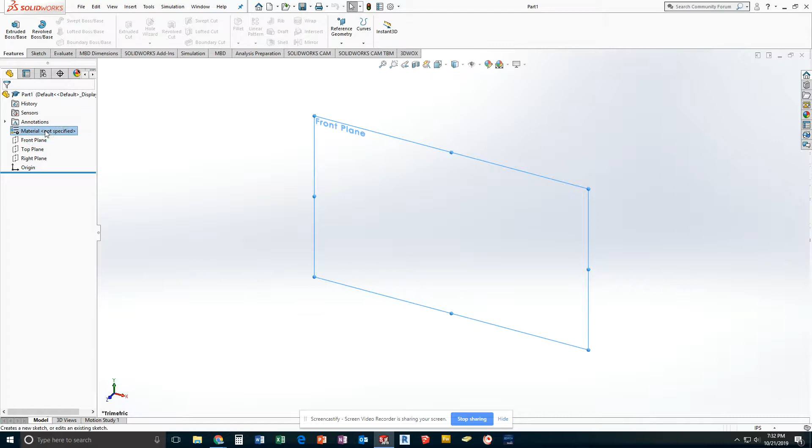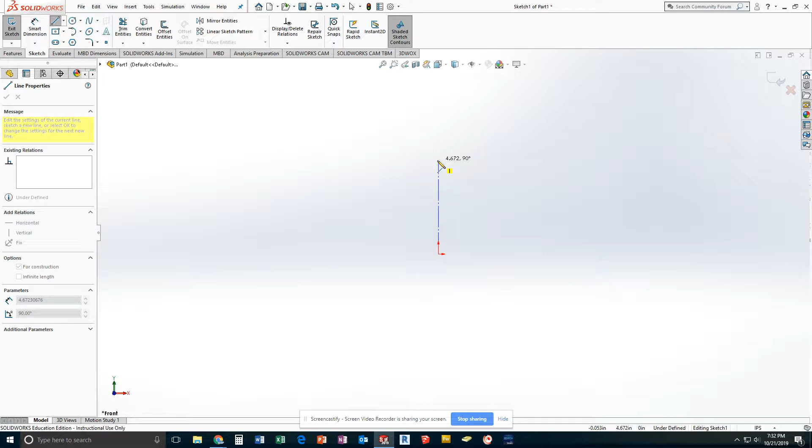To start with, I'm going to go to the front plane and start myself a sketch. Once I'm done that, the first thing I want to do is drop down my line tool and grab a center line. This is going to be the axis in which my coffee mug is created by rotating around it. I'm going to start it on the origin and draw it straight up over 4 inches, just because that'll make things easier, and make sure it's vertical.

Next thing I'm going to do is switch just to my standard line tool. Somewhere near the top, don't actually line it up, somewhere near the top-ish, I'm going to draw a non-vertical line, meaning it's close to vertical, but not actually vertical. So I don't want to get that relationship of a vertical line. I want it something like this. Because what I'm going to do next is use my dimension tool to identify where in space this point is and where in space this point is.

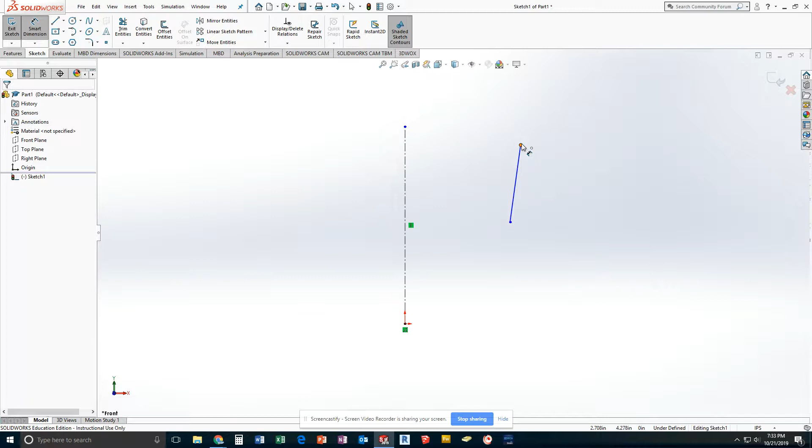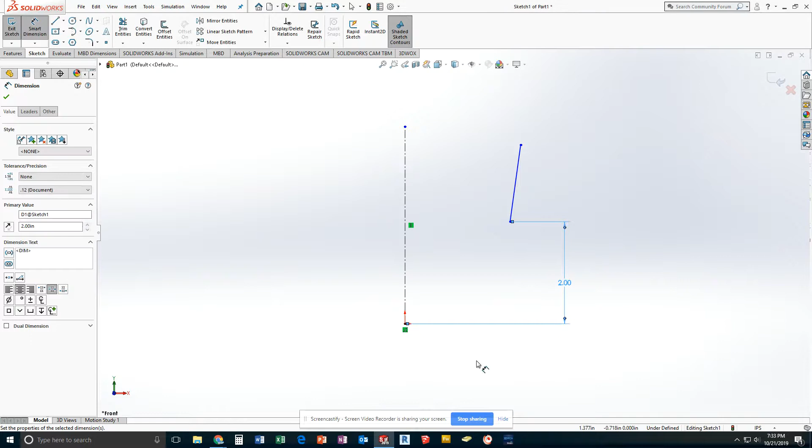So the first thing I'm going to do is go from the origin to the bottom point, and I pull sideways so that I get the vertical height. This I want to be at 2 inches. The next one I'm going to do is go from my point to the top point, pulling outside here, and I want this to be 4 inches so that I have that line there.

Now the next thing I want to do is identify these horizontally. I could do exactly the same thing, but since I'm having to draw half of the coffee cup profile, if you're measuring something, sometimes that's not easy to do, especially with circles. It's much easier to sometimes measure the diameter using a caliper or something of the sort. So here's a cool little trick in SolidWorks. If I click a point and then I click a center line, it'll give me the distance between the two. Or if I move across the center line, it would give me the overall distance if I had known the diameter, since this is going to create something round.

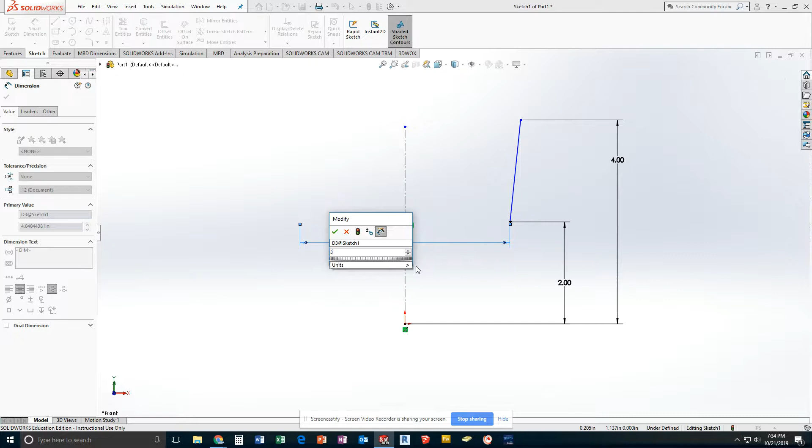This is what the directions show me to do, and I'm supposed to set this one at 3 inches. And then the top point to the center line, I'm supposed to set at 3.375. And I'll set those there. That's my first line, and you can see that I am now fully defined. It's a nice thing to do to kind of check on your way that you are defined as it goes.

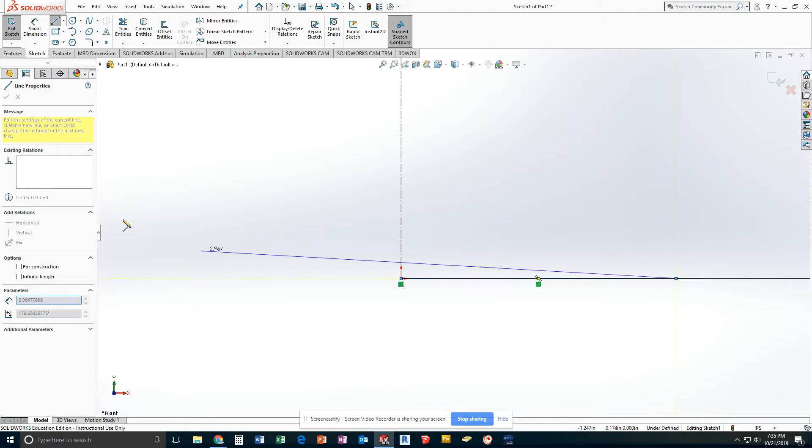The next thing the directions tell me to do is to make the bottom line of my cup. So from my center line, or from my origin, out, I'm going to draw a line. I'm going to give this its width dimension the same way I did the widths before. Oops, the wrong thing.

In that, I'm going to go with my Smart Dimension tool by clicking the outside point and the center line. I can set this, and the dimension that it gives me is 2.125 overall. The nice part about that measurement is if you set it incorrectly, this point will be outside of this point, meaning your curve would have to go the wrong way. So most people catch that error, but if that's you, that's what you want to do.

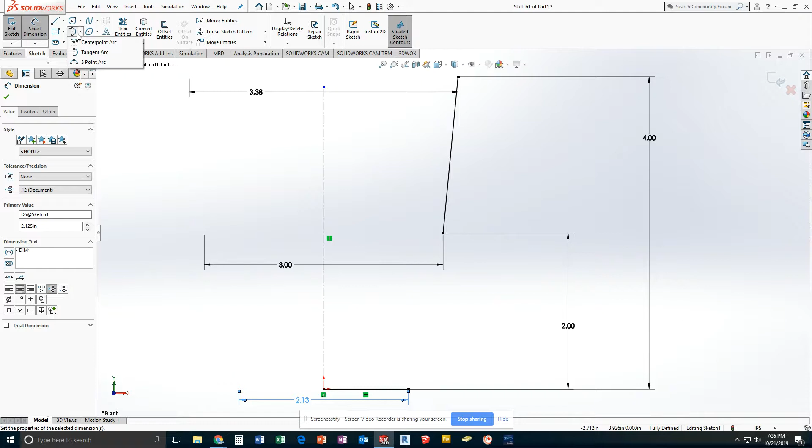Let's go ahead now and add our arc, because this is an arc, not a straight line. So I'm going to get the tangent arc tool. So you might have to drop down your arc tool and get tangent arc. It's really important that you start at this top point because this is the line that the arc is actually tangent to. All you should have to do is click that line and come down and click this point right here. And again, it should be fully defined because of all of our other relationships. This is the profile of the outside edge of the mug to start with.

Now, because our mug is not solid, we're not going to cap the top. Instead, we're going to use one of our offset tools called offset entities to create the inside edge, basically. When I click offset entities, I want to make sure that add dimensions and select chain is checked. If the yellow line shows up to the outside of my profile, go ahead and click reverse also. This is very helpful.

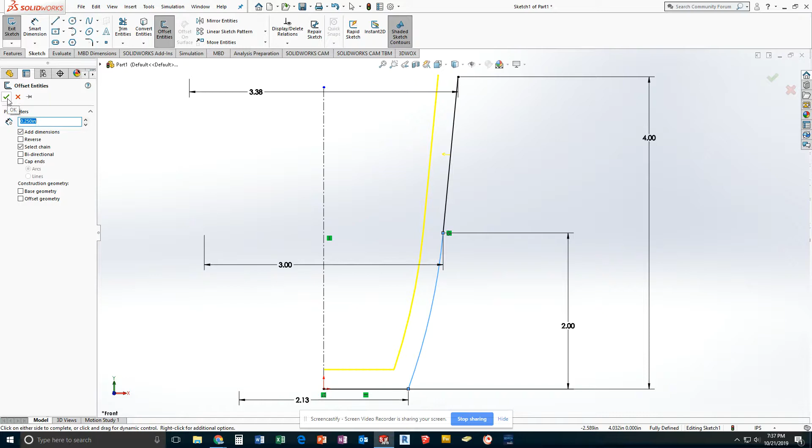Next, I want to set my thickness. So the thickness of my mug is supposed to be 0.25. That's how thick the actual wall of the mug is. So 0.25 is what I will set it at and what I will accept. Now, one of my options there was to cap the ends, which I do want to do. However, I want to do it with lines.

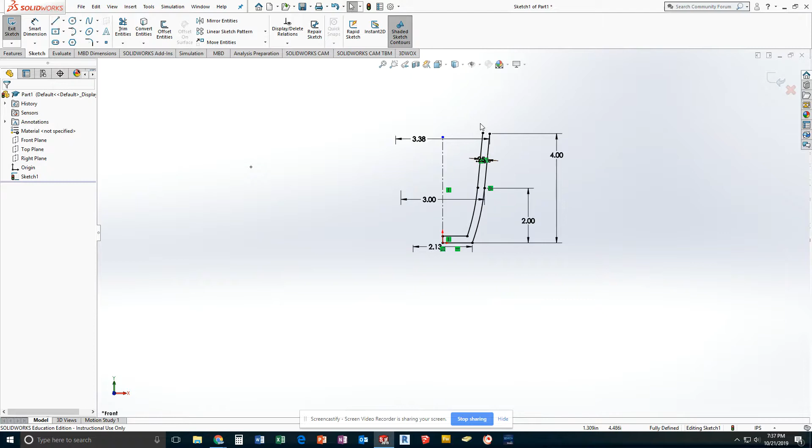So I'm going to get my line tool again, and at this point, I am going to cap this end, just like that. Which, if I had checked the box that says capped ends, it would have done that for me. However, up here it would have caused a problem. As you can see, there's an angle here. So it would have capped these along an angle, and that's not what I want. So what I want to do in this case is I want to draw a horizontal line longer than I need.

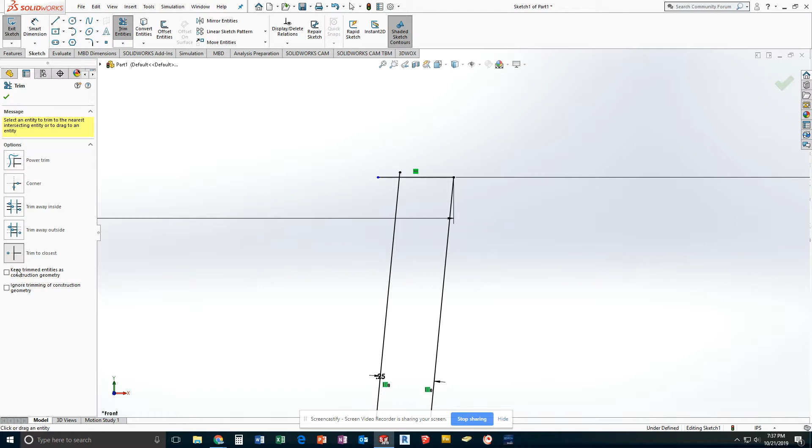I'm then going to go to trim, make sure I'm set to trim to closest, and click the little tails that hang off the edge. As long as you have shaded contours selected, once you trim those parts away, you should get a shaded profile there. This shows me that I'm ready for the next step, which is called a revolve. I'm going to create material by having this profile spin around this axis. As you can see, I've drawn what the coffee mug would look like if I cut it in half one way and then cut it in half again 90 degrees from there, and all I did was draw the edge.

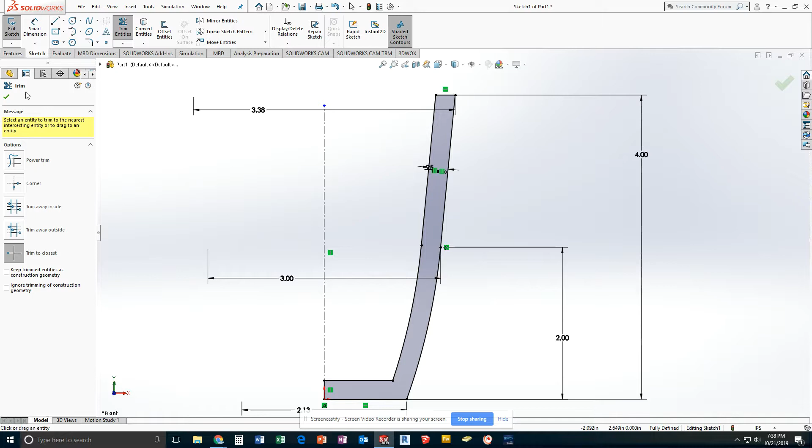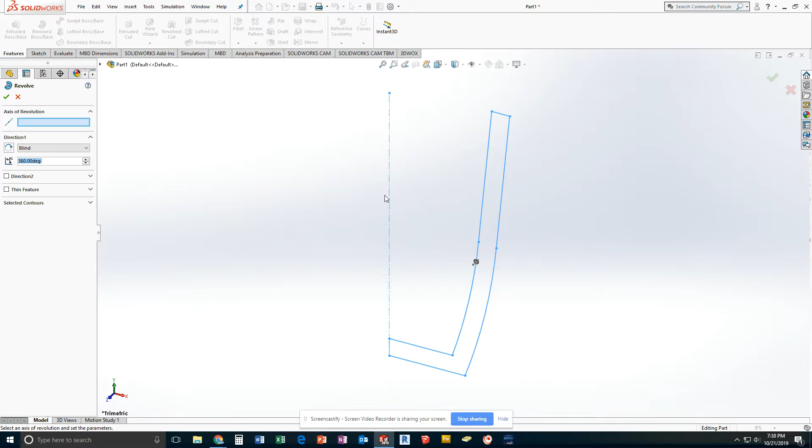So I'm going to go ahead and exit my sketch, and with the sketch highlighted, hit Revolve Boss Base. It's the one that looks like part of a donut. It should automatically put you into a trimetric view, and it's going to ask you for the axis of revolution. So I need to tell it that I want it to revolve around this center line. Seems redundant, but the software wants to make sure it's using the right axis. And this will create the initial part of the base of my mug. So I'll go ahead and accept it.

Right now I have the basis of the mug. The next thing that I am going to do, that my directions tell me to do, is to use the fillet tool to put a 0.1 inch radius at the bottom edge of the mug.

So I'm going to go ahead and hit the fillet tool, which lucky for me is already set at 0.1, and I've got a standard fillet type. I want to put it on this bottom edge. And if you don't see that, make sure that your settings are set to full preview so you can see this little yellow version of what's going to happen. And that's exactly what I want to have happen. So I'm going to go ahead and accept that.

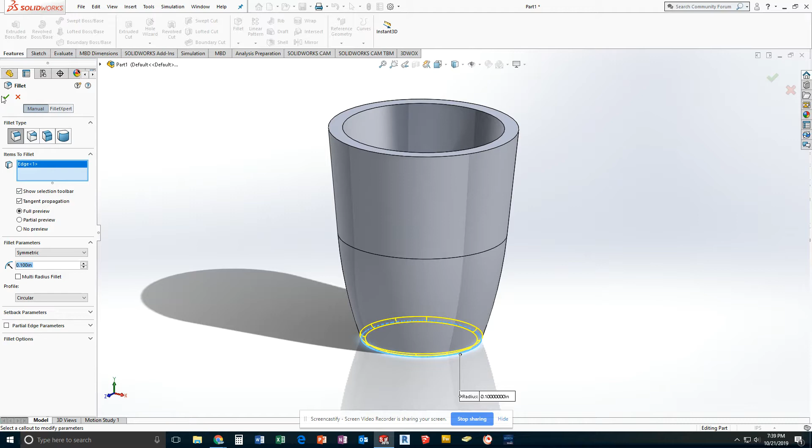When I look next at my directions, sorry, flipping a page that just seems to want to stick.

The next set of steps that I'm going to do is to create the rounded top on my mug. So as you might be aware, on ceramics and stuff, we don't really have square corners. And we wouldn't see these two square edges like this. They'd be highly likely to chip. We'd see the top of this rounded, plus it's for drinking, so that rounded edge would really help with that.

So I'm going to get my fillet tool. And the nice part is I am not going to type in a fillet dimension. Instead, I'm going to use the fillet type that is what's called a full round. What this means is I'm going to select 3 sides, and the middle side is the side that actually goes away. Okay? So for the blue side, I'm going to pick the outside of the mug.

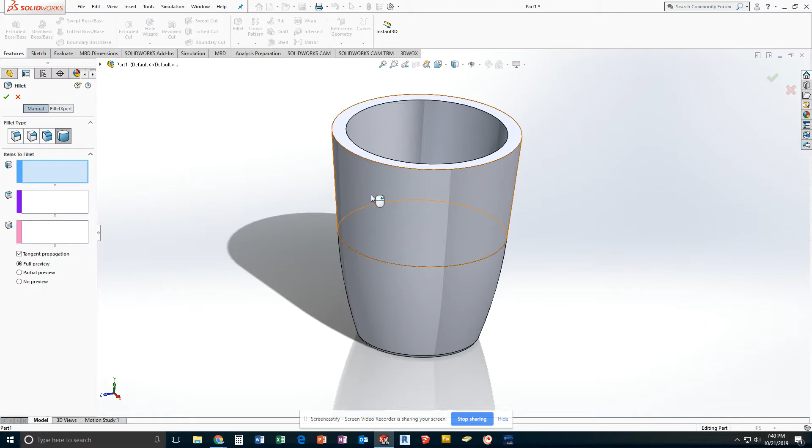For the purple, the part that goes away, I'm going to actually pick this top edge. For the pink side that kind of surrounds it, I'm going to pick this inside area. And what it should do, and it might be hard to tell, but basically it's showing me that it's going to round this and the purple edge is going to go away. I'm going to accept that, and now I've got a fully rounded mug on the top. Also very handy.

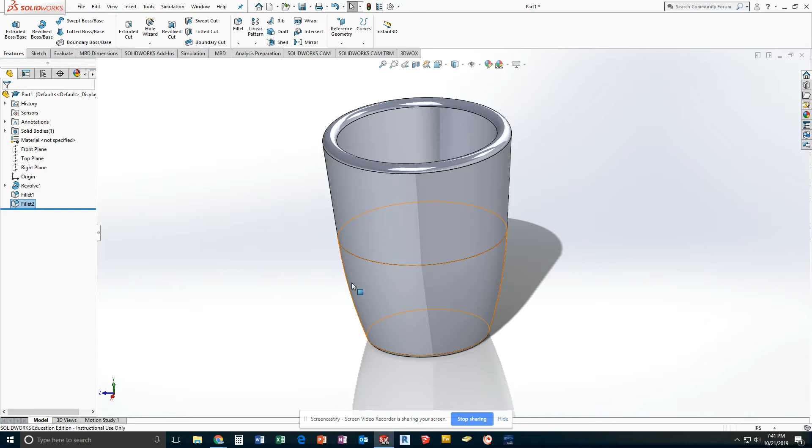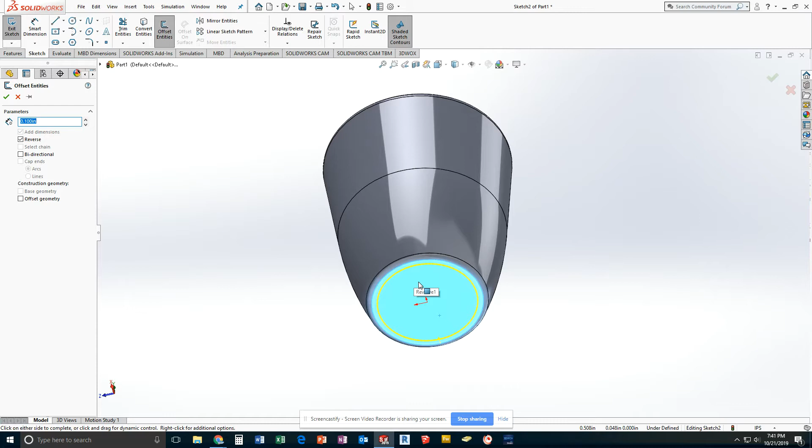So now I'm going to look at the bottom of my mug. So I'm just going to rotate myself to look at the bottom of the mug. I'm going to click on this surface and start a sketch. With that selected, I'm going to click Offset Entities. It's going to want to create something, and it remembered my 0.25 from before. So I want to actually change that to be 0.1. And I want to reverse it, meaning I want it to go to the inside. Once I've done that, I will accept it, and I should have a fully defined drawing.

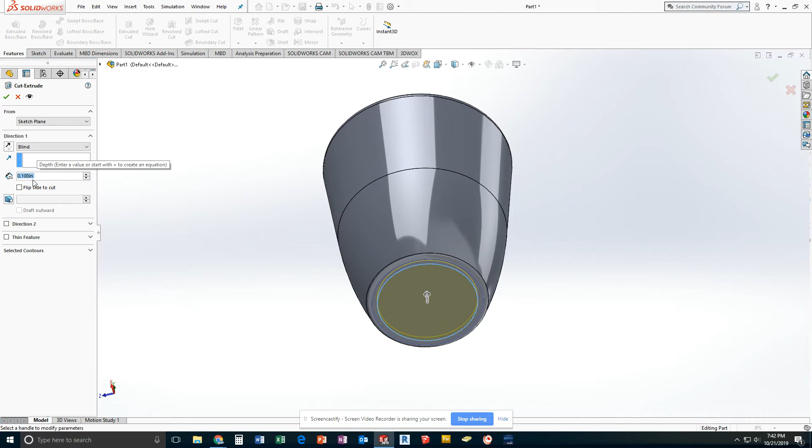I am then going to go ahead and exit my sketch, go to Extrude Cut, and it's going to be asking to cut upward, currently at 0.1. I am not going to want to do 0.1. I want it to do half of that, so 0.05 is what I want. And that'll cut it up just a little bit.

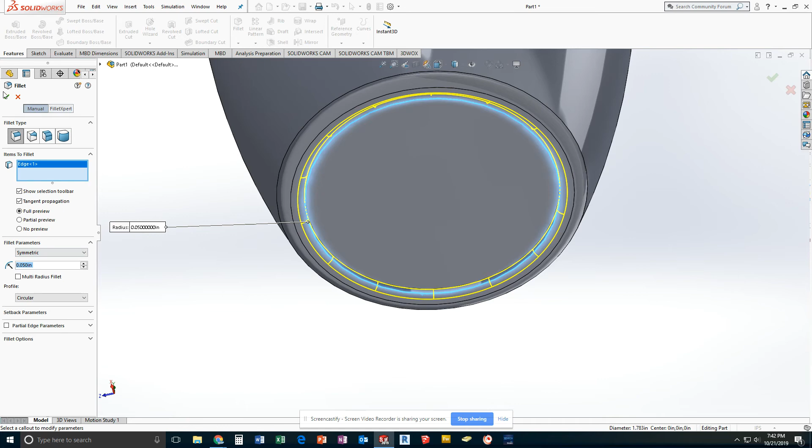Now I have a 90-degree edge right here that I'm going to want to fillet. So I'm going to go ahead and click Fillet. And instead of being 0.1, directions tell me to use 0.05. And I'm going to create a filleted edge right there. Once I've done that and accept it, this is my mug. This is the mug base.

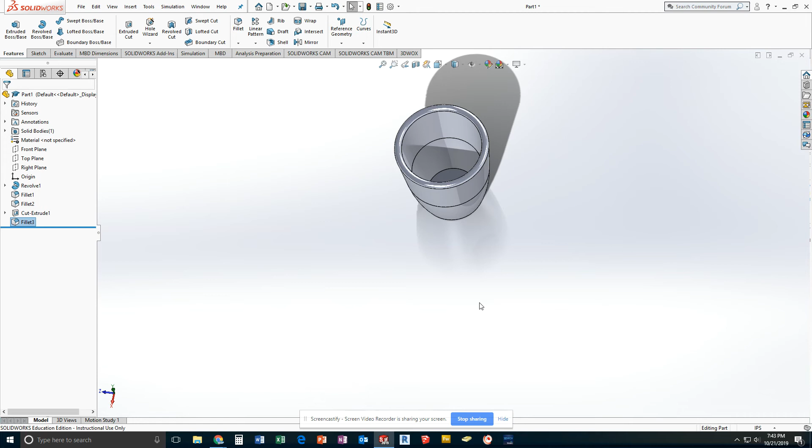Now I am going to do one last thing that in my set of printed and posted instructions comes at the very, very end of this process. And that is to put the fillet down in the bottom of the mug. That is this edge right here. The directions tell me to use a fillet with a radius of 0.125. I'll do that and then accept it.

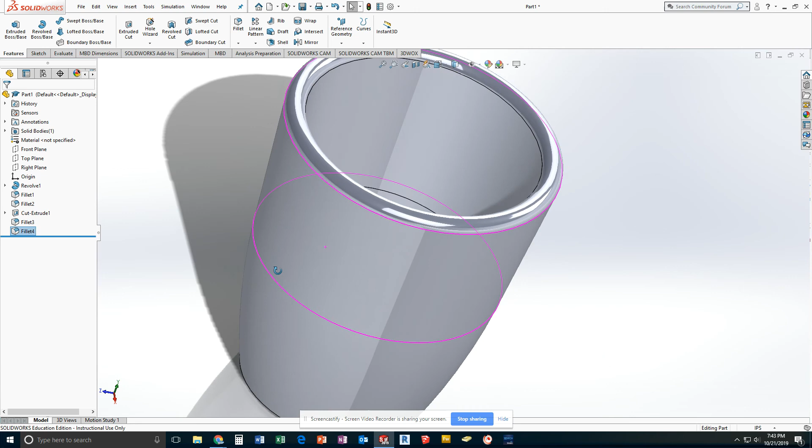Because again, we wouldn't see a 90-degree corner where those meet. They would meet with a smoother surface to make that stronger. This is the base of the mug and what it should look like. At this point, I am now ready to start creating the handle.